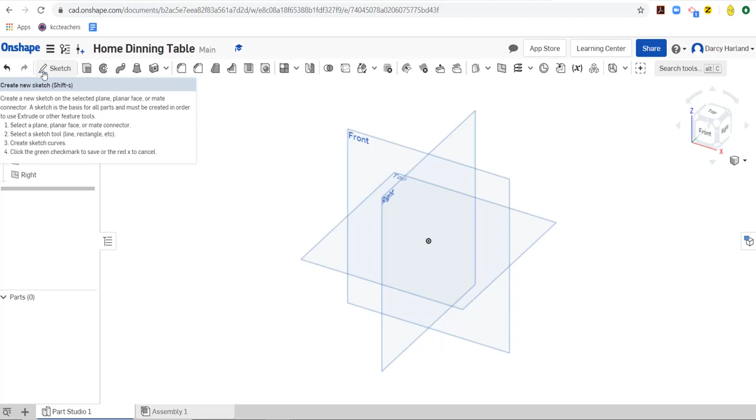We're going to create our parts in our Part Studio and then we're going to assemble the table in Assembly 1. So let's start with, I think, probably the more complex part on the table, and that's the leg. It's not very complex compared to some things that you can make, but as far as the table goes, there's lots of very basic shapes, so this is probably the more complex of the few. Let's start by drawing on the front face, and I'm going to arrange that so I'm looking on the front view of that face.

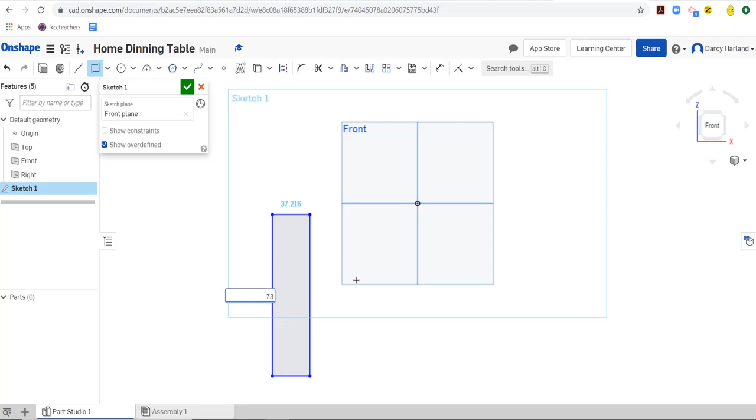I'm going to need to take my rectangle tool and draw a rectangle out, the same as my measurements, 730 long and 75mm wide. Okay, there's my rectangle. Now it wasn't a true rectangle. As you remember from the first video, it was narrower at the bottom. It didn't actually start the taper from the very top edge. It actually came down about 110mm before it started cutting in.

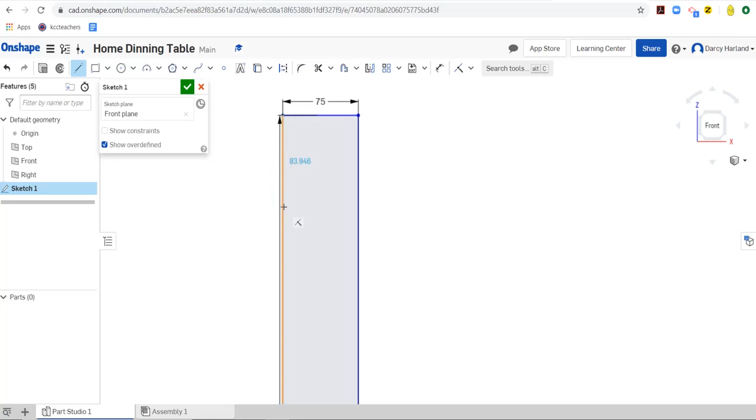So I'm going to get a line here and I'm going to go from the top edge down 110mm just straight down so I can create this point. From that point there is where the taper is going to start. So from there down to this bottom edge, I'm going to click on that bottom edge. I'm just going to hit escape now so I don't keep drawing lines. Okay, that's where the taper is going to go.

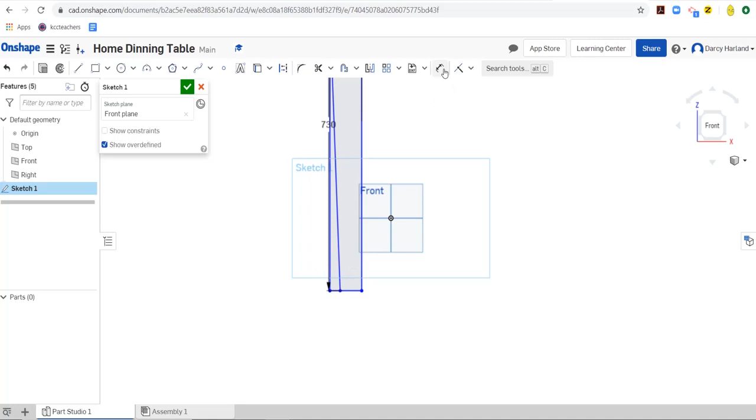Now, I haven't got a measurement down the bottom here yet, so I need to go to my dimension tool and I need to measure from this point to this point. We want it to be 60mm. Now you could alternatively measure the bit that we're cutting off, which would be 15mm, but it doesn't really matter at this stage as long as you've got that shape.

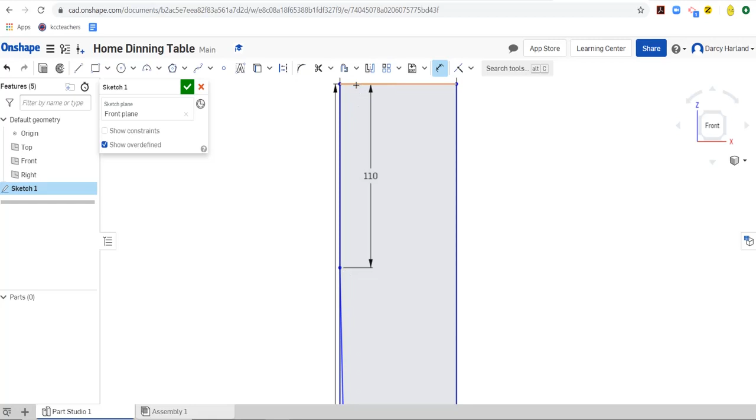Now this section, as I mentioned earlier, about 110mm from the top, it's actually still 75mm wide, and that's because there's a flat area for the rail to glue up against so that you do get a square edge on that rail to leg join. Okay, that's our shape. I'm going to hit the tick.

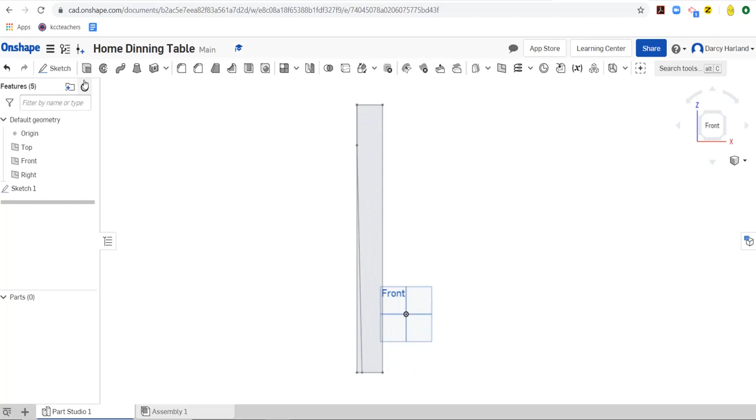Alright, we need to extrude that 2D drawing into the third dimension now. So we're going to hit extrude and I'm going to click on the leg, and I don't want to extrude it 25mm, I want to extrude it 75mm. So I'll hit the tick. Okay, so that's created our leg. It's got a taper on one side, but if you remember from the first video, it actually tapers on the two inside faces. So I'm going to need to taper this edge as well.

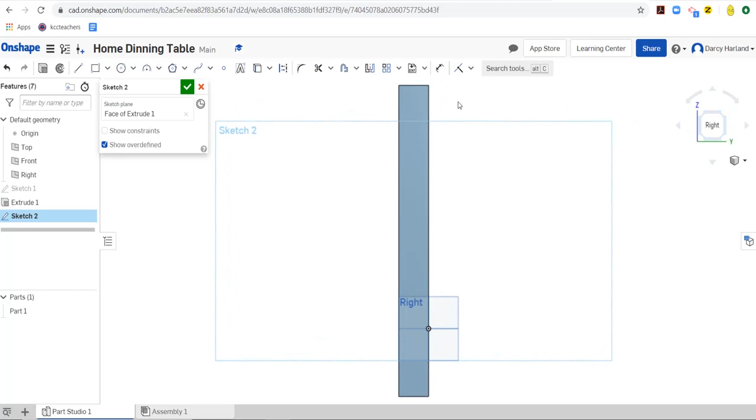The way I'm going to do that is I'm actually going to turn it around and look at it from this end. So I'm going to draw a sketch on the back face here. We're going to do the same thing as we just did, coming down 110mm. That's that flat section. And then coming in, joining the bottom edge there, hitting escape, and then making sure the measurement from this corner to this edge is not 46 but 60. Okay, and then I hit tick.

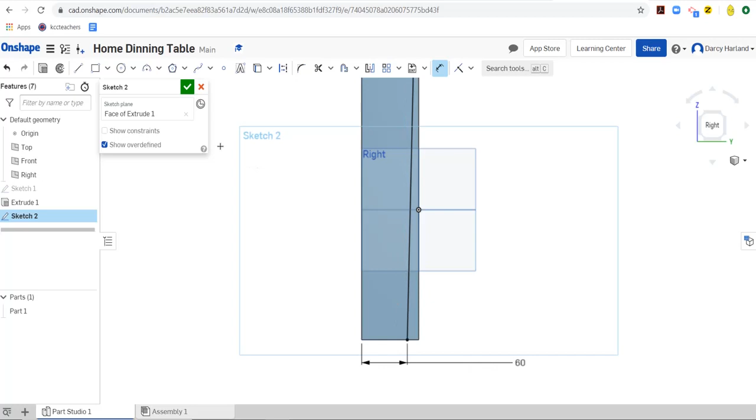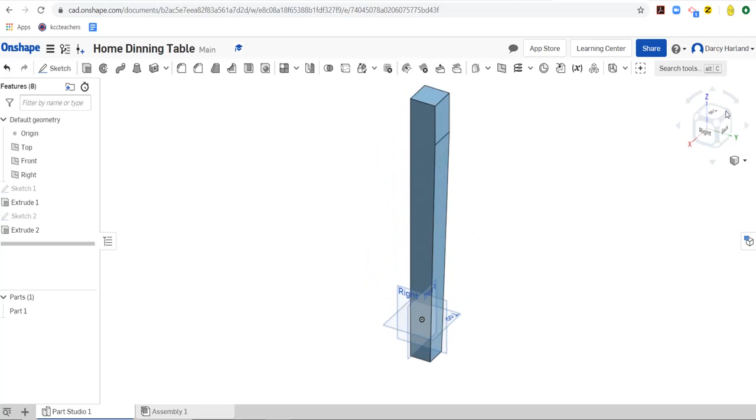Alright, now to remove that little section out, I'm just going to go extrude again, but I'm going to change extrude to a remove. And then we're going to change the blind to a through all so that it goes through the whole shape. And we've got now a leg that has two sides tapered and two sides that are straight.

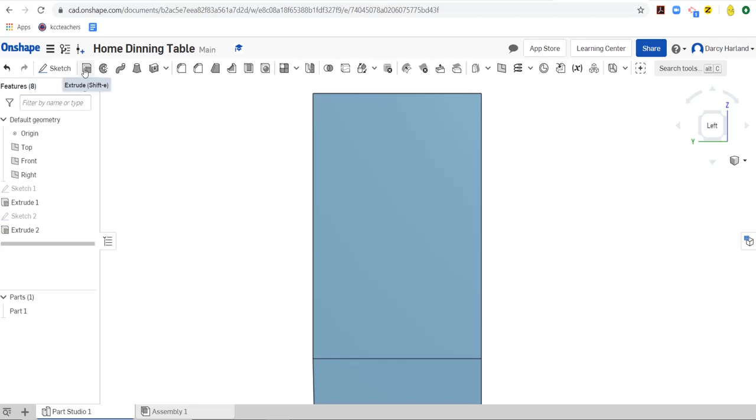Alright, I need to design the mortise hole now on my leg. So I'm going to need to cut that hole. It might be helpful to draw a sketch of this first, but I'm not going to bother with mine. I'm just going to make a rectangular shaped tenon. So I need to do a sketch on this edge, drawing a rectangle. It's going to be 70mm wide, and it's going to be 12mm thick.

Okay, and I'm going to measure from my top edge of my leg to the top edge of the hole. I want that to be 10mm. And then from the outside edge of my leg to the outside edge of my hole, I want it to be 24mm.

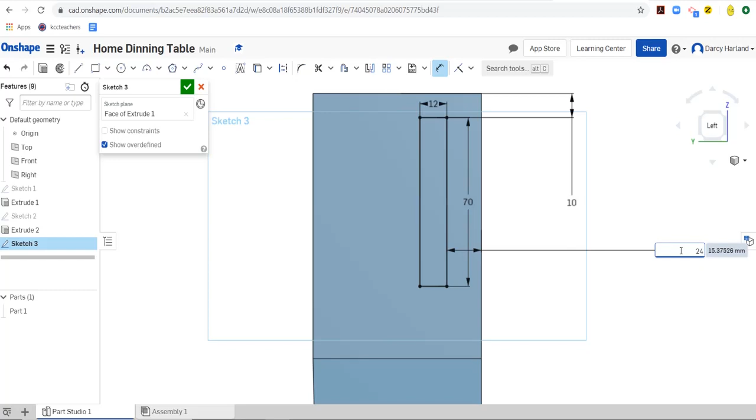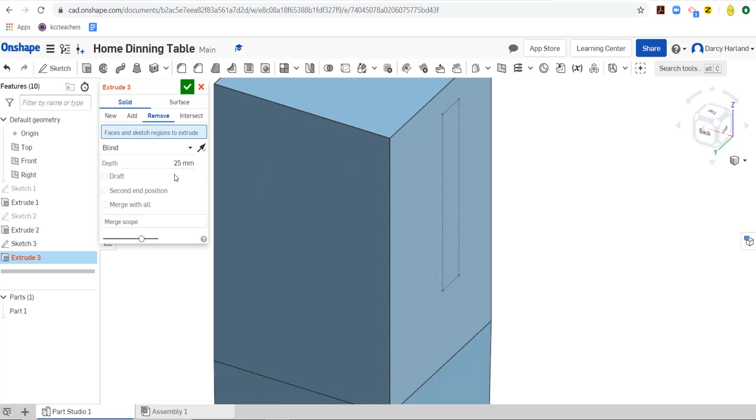Okay, 24mm from there. Okay, good. Hit the tick. Now I want to actually extrude that, or rather remove that section because it is a hole. So I want to go here to extrude. I set it as a remove, a blind remove. It's not going all the way through, it's only going part of the way. So we're going to go 25mm in there, just like so.

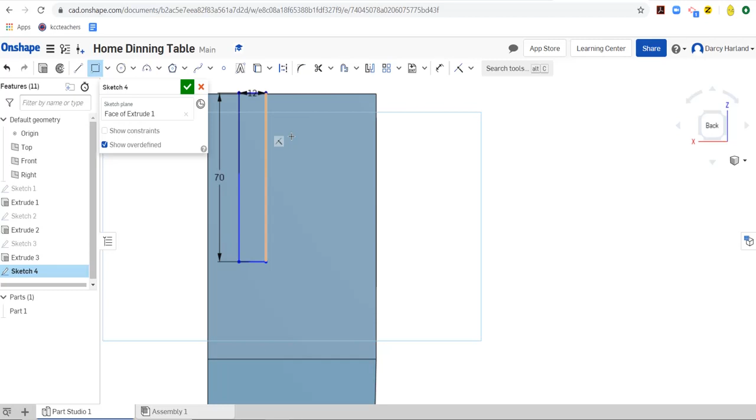Now I need to do the same on this side. So we're sketching another hole, exact same shape on this side here. So I'm going to cut a rectangle that is 12mm wide and 70mm long. And then now look, from here to here is actually sitting over, so I need to grab that line and move it down. Okay, now from there, I'm going to go measure from here to here, 10mm. Okay, and from here to here, just like before, it's going to be 24.

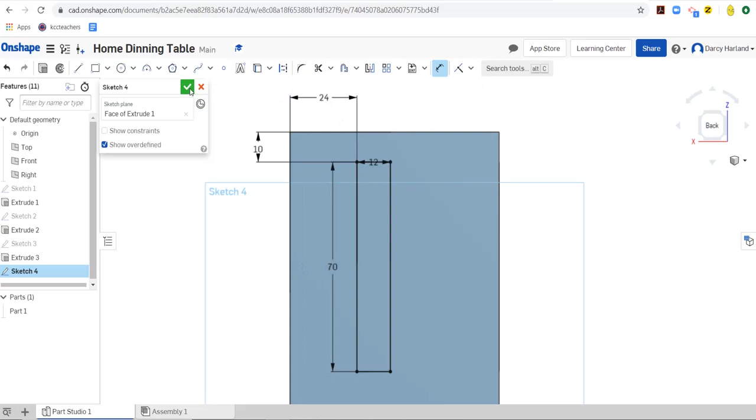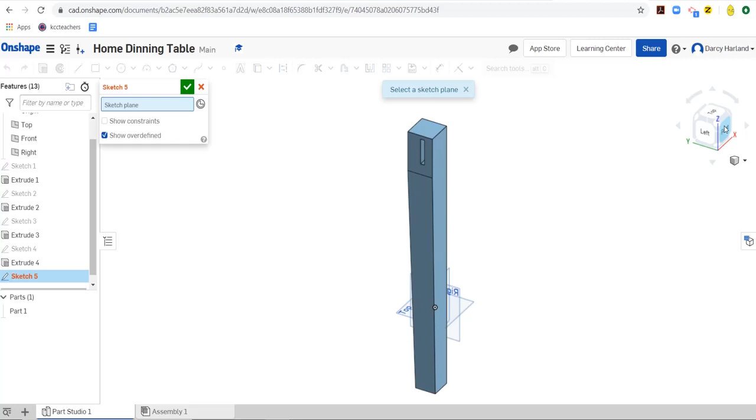Okay, I'm going to hit the tick, then I'm going to remove that section, extrude, remove, and it's a 25mm blind hole. Click the tick. Okay, now I've got my mortise holes in my leg. Alright, so now I'm going to go ahead and start with my rail. So I need to start a new sketch again, and again I'm going to turn this around so I'm seeing the front face. I want to sketch on that front face again, but I don't want it to intersect with this leg at the moment. I want to have two separate parts.

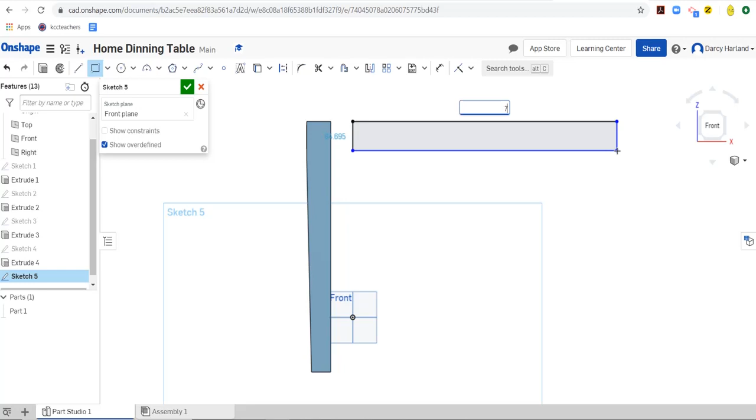So I'm going to go ahead and grab a rail. I'm going to draw it. It's actually going to be in line with the top of the leg there, but it doesn't really matter if it's not. And from my measurements that I've got on my piece of paper here, I'm going to do my short rails first. They should be 790 long, and they should be 90mm wide. Okay, hit the tick. Then I'm going to extrude them into the third dimension, making them 20mm thick. Tick. And there is my rail.

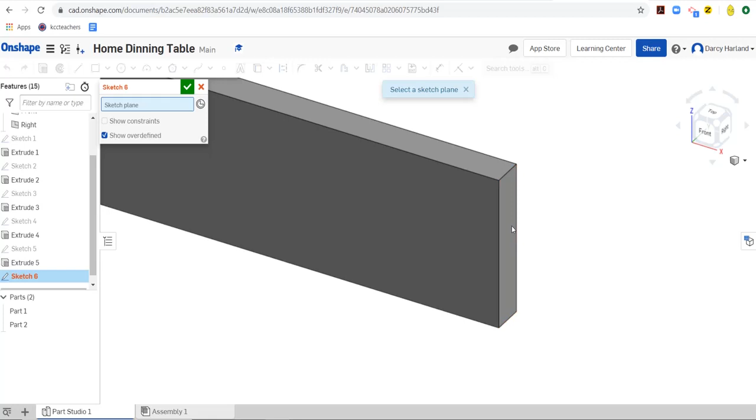Now my rail doesn't have a tenon on it yet, so I need to sketch on the end of my rail. I want to have the tenon. And the tenon is going to be the same size as the hole that I did just before. So using that rectangle shape again, actually this time I'm going to go the center point rectangle. I'm going to find the center of this end. And I'm going to do that by highlighting the edge, finding the middle of that edge with that box around it, and then drawing straight down and doing the same on this edge. And you'll notice that when I find the middle of it there, those two points line up.

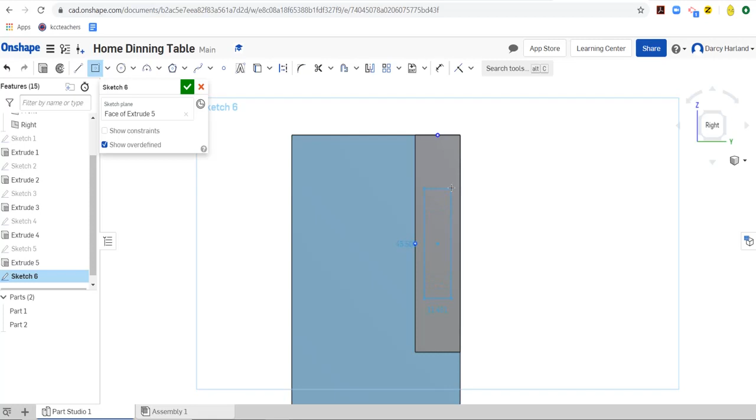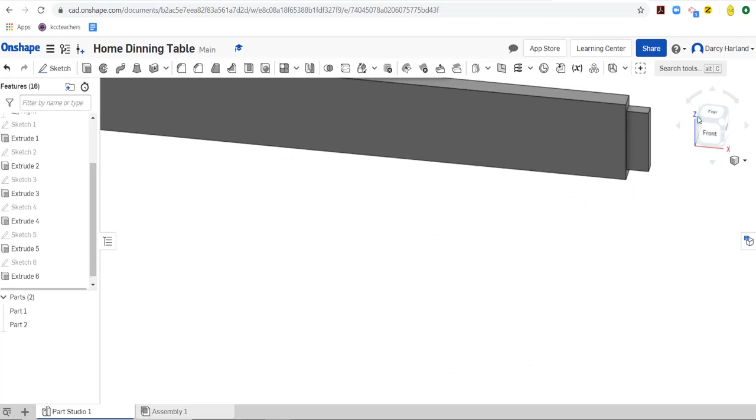Okay, so we're going to, again, make it 70 by 12, which is the size of the tenon that I decided earlier. Okay, I'm going to hit tick. We're going to do an extrude. This time it's an add extrude, and we're going to add it to there. And you'll see now I have a tenon on the end. Alright, I need to do one on the other side here. Now at the moment my leg is kind of in the way. I can't quite see this end without the leg covering it.

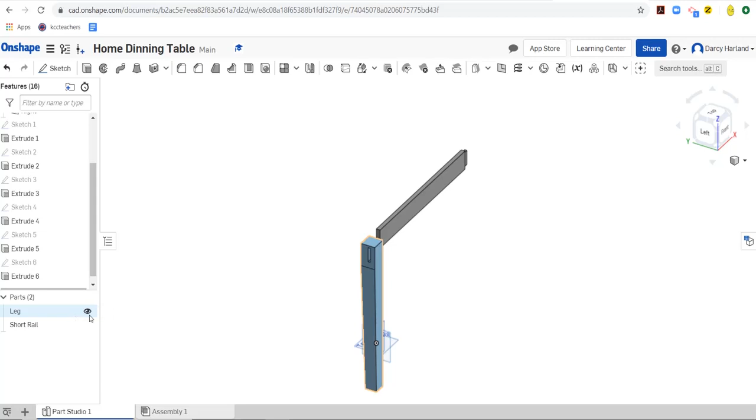So what I'm going to do, you'll notice the list of parts down here is just on the left hand side of the screen. I can actually rename these parts. So part 1 is actually my leg. Rename it. And part 2 is my short rail. Okay. Now what I can actually do is I can see this little eye shape. I can actually click on that eye, and it makes it hide the leg so that I can actually look through the leg and work on the end of the rail without the leg in the way. And that's what I want to do.

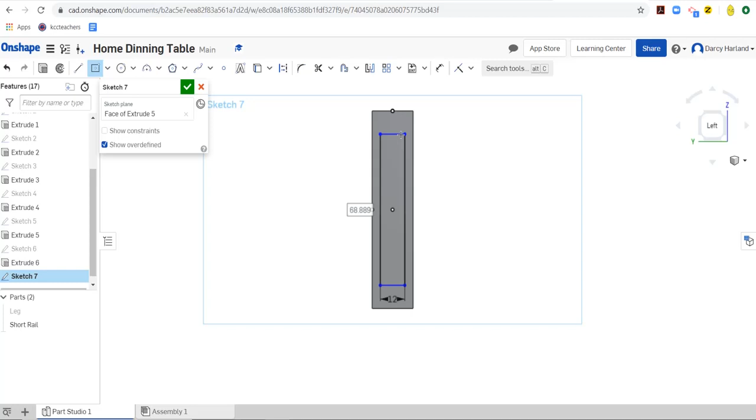So I want to sketch on the end of this rail now and do the same as before. Find that middle point by finding the middle of this edge, the middle of this edge, where they intersect, drawing that out, and it needs to be 12 by 70. Okay, hit the tick. Now I want to hit extrude as an add, and I'm going to make it 25mm, which it defaults to, and there we go, there's our rail. So that rail can now slot into the leg when I go to the assembly.

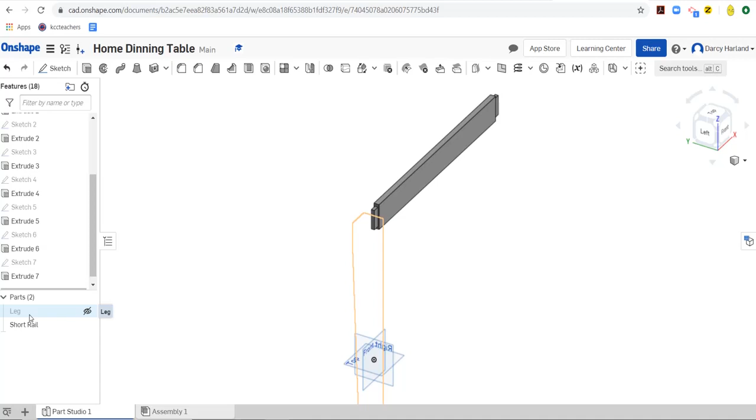Alright, I'm going to fast forward now and draw up the other parts, but in the video I'm not going to show you step by step how to do that. That's pretty much the same as what I've just done there, only I haven't done the long rails yet. You only need to do one of the legs. Now that I've got one, they're all the same. And we need to draw a top as well as that middle rail that I talked about in the first video. So I'm going to fast forward the video now. You'll watch me make it, but I'm not going to explain these parts just because they are pretty much doing the same thing as what I've just done here.

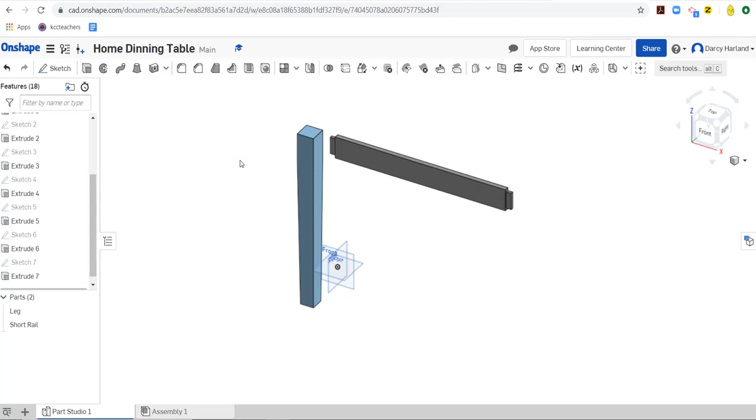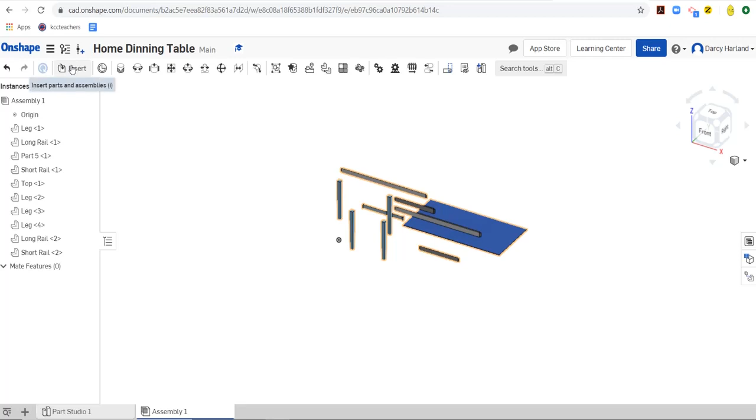Gone into my assembly now, and I've gone and inserted all those parts. So I should be seeing one top, 2 long rails, 2 short rails, 4 legs, and 1 middle rail. Okay, I'm not going to draw my corner blocks for now just because they're not really that important to the job, but if you want to do yours later you can. But right now I'm going to put all together the really important parts of my job.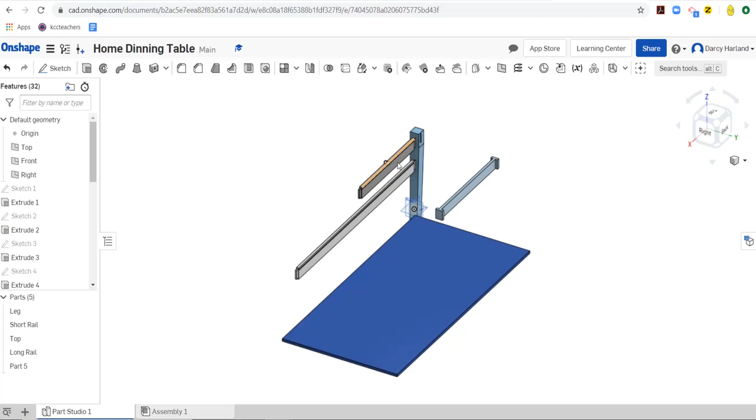And I only drew one of them. You should notice in Part Studio I've only drawn one leg, one short rail, one long rail, one middle rail and one top. But in the assembly I've just added as many rails. Because they're identical, I've just added the same rail twice. Okay, so now I'm going to put my parts together.

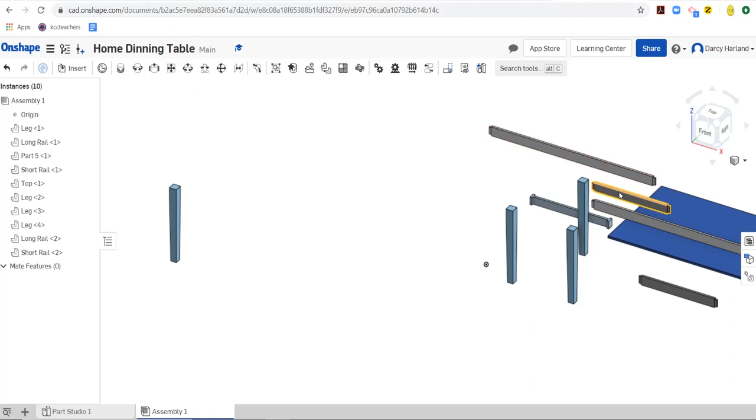Let's start with my leg over here. I'm going to move it away from my work area so that I can have a bit of space to work with it. Okay, so we need to slot one of these rails in there. So let's grab one of these rails and move it over as well. I'm going to grab a fasten mate and we're going to fasten, I'll arrange my view around.

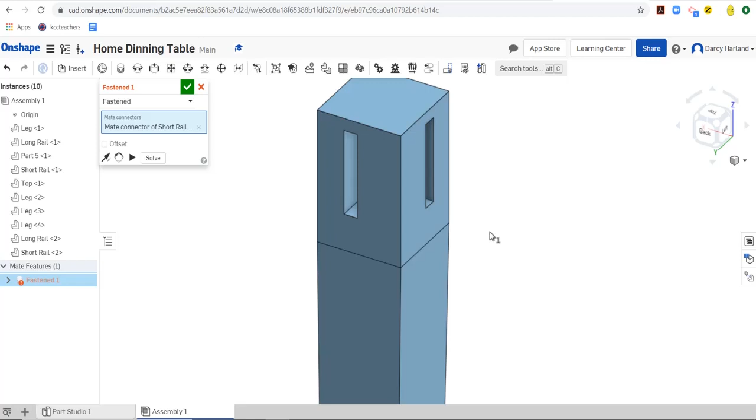We're going to fasten this tenon into the mortise on this side of the leg here. Okay, get a good view of that. There we go, into that mortise there. So quick tick in there. Does it look right? Not quite. It looks like I've clicked the outside of the hole, so just move that out of the way. Let me try that again.

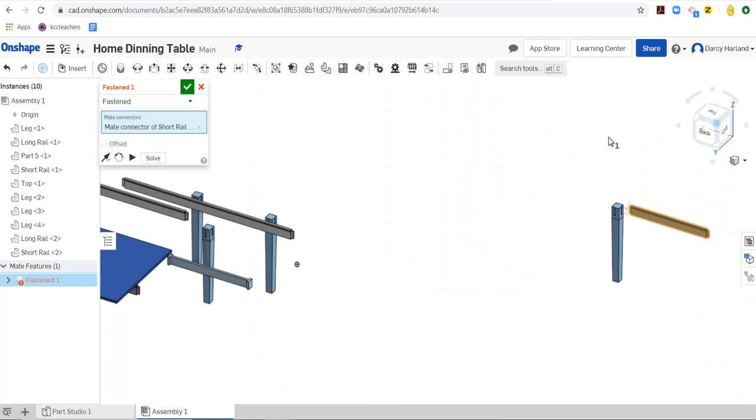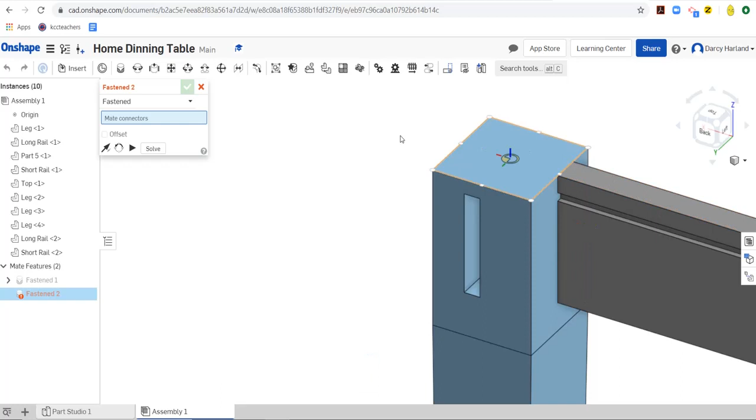The inside of the hole this time. Try that. That's better. So now it's sitting inside that hole. The tenon is fitting into the mortise. Okay, and I hit the tick. All right, I'm happy, and I've got that groove in my rail on the inside edge.

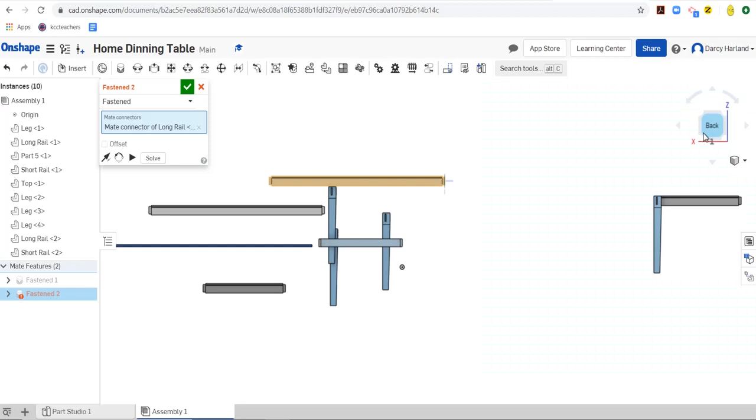Okay, now I need to insert my long rail into the other side. So let's go ahead and mate this long rail. I believe that's a long rail. Yes, it's a long rail. The very center, if I can find it, very center of that tenon, right on the end, slots into the very hole inside there. Oh, it's turned the wrong way. Need to turn it around like so, and there it is, slotted in. So I hit the tick.

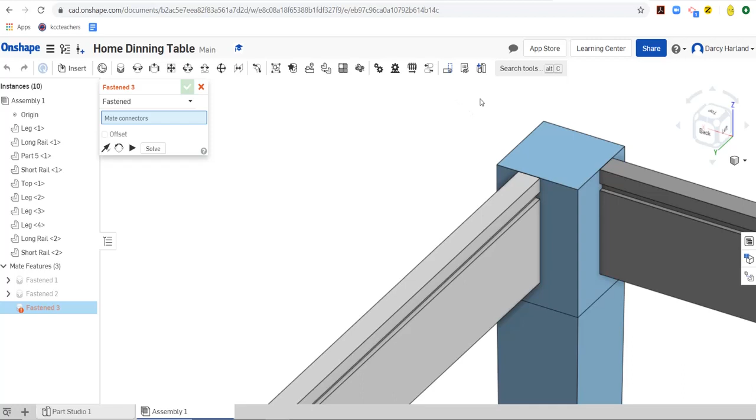All right, we're going to continue in this fashion. Again, I'm going to fast forward the video so I don't have to explain the whole lot, but it's going to continue this way, slotting the tenons into the mortises, and then attaching our mid rail and our top as well. Okay.

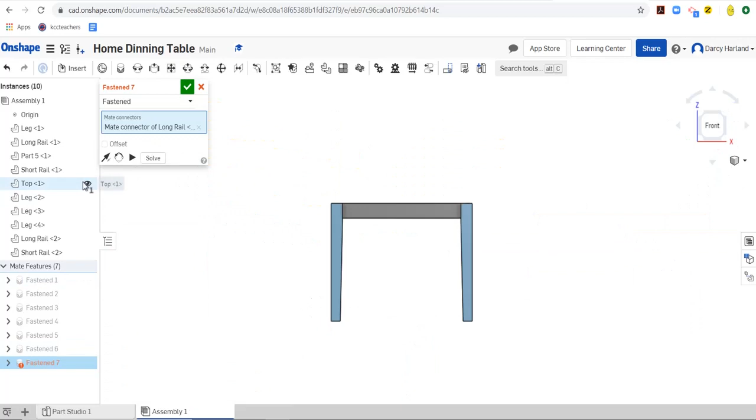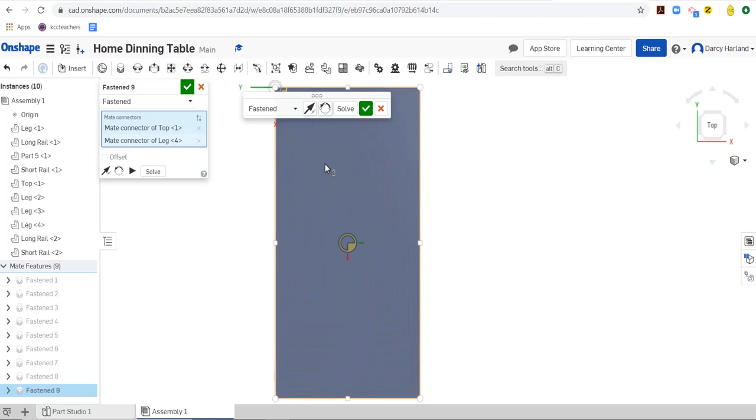Okay, I'm just about to slot the top on now as the final part of my table, but I need to offset this one. It doesn't match up perfectly with the corner. You can kind of see from the top, we don't want that leg right in the corner there. We actually want it to move so that it's further around here and there's an overhang around the table.

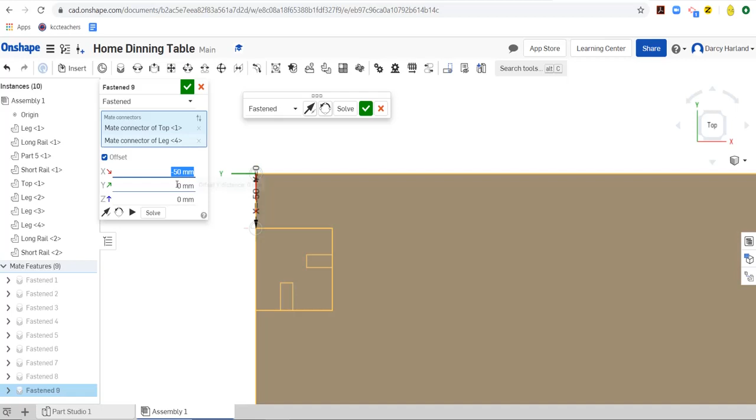Now I went and measured my table to see what the overhang was, and I'm going to click offset here. I'm going to bring the x-axis the other direction, minus 50 mil, and we're going to bring the y-axis across 25 mil. Okay, so now it's sitting down from the end, like that. And if I get a good look from underneath, you can see it looks pretty even now.

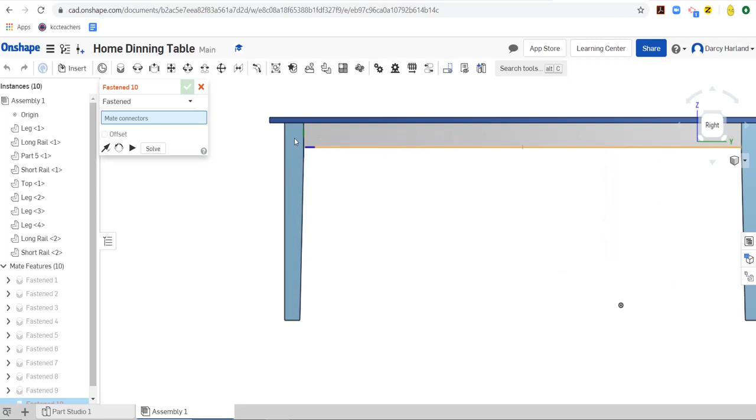Okay, so there is my table all constructed. You can see all the rails are grey, all the legs are light blue, the tabletop is dark blue, and that is pretty much my design completed. Alright, hopefully you guys have just as much success with your design. Remember, your design will look different to mine, but if you want to, you can use the same measurements that I had in the first video for your design.

If you've got a table that has turned legs, I suggest you just pretend that they're square legs instead, because turned legs are a little bit trickier to design on Onshape. It's possible to do, but if you're not really very savvy with the program, you might find it a little difficult.